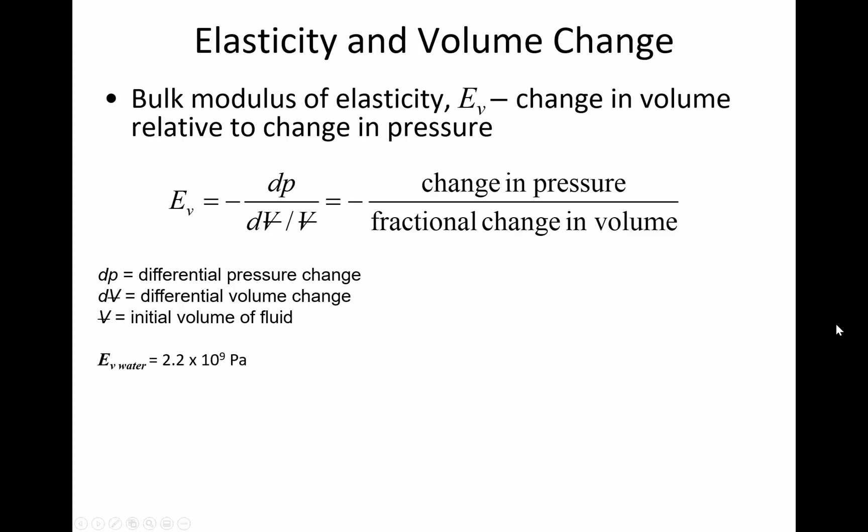So announcements. First, if you haven't already made arrangements to get a copy of the textbook, please do that as soon as possible. It's a valuable resource to get a second opinion on how to explain this material. I'm going to do my best to explain it clearly, but sometimes you need to hear things from a different perspective. The homework assignments mostly are questions I myself have written, so you won't need the textbook for the homework problems, maybe with a few exceptions, but you will need it to learn and understand.

So that's the first bullet point. The other is, of course, I am accepting calls on Microsoft Teams, just so that both of us can get a feel for how to do this.

You need to call me for these 10 bonus points before Tuesday, September 1st, at 5 p.m. You're welcome to try calling me outside of my office hours. It's just that I may be in another meeting or away from my desk, so it's during office hours that you have a much better chance to get a hold of me. And I'll pick up unless I'm already in another chat with a different student.

Homework 1 is going to be due on Thursday, the 3rd of September, before 11 a.m. Our class meeting is at 11 a.m., and you have to submit the homework assignment before class that day.

Let me show you where you can go to get homework number 1. If you go to our class page in Blackboard and click on the homework tab, you can see homework 1 is there. If you click on the PDF file, it'll bring up the homework problems. There are 9 of them for this assignment.

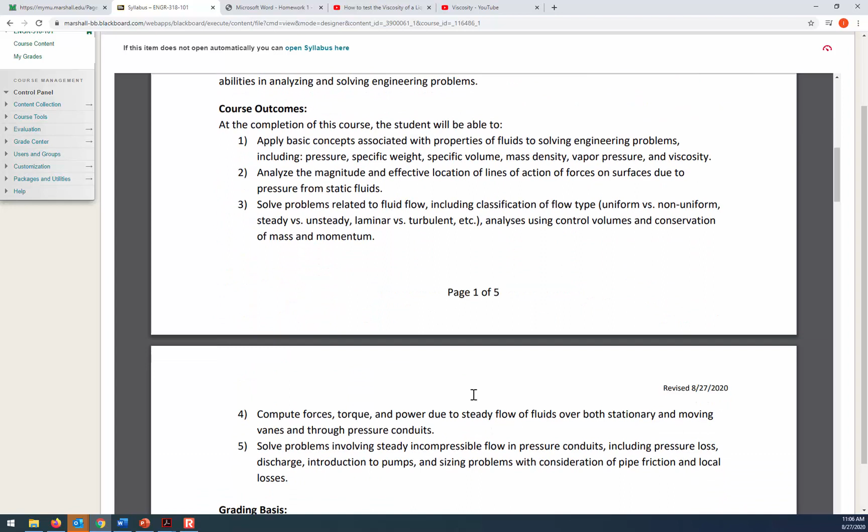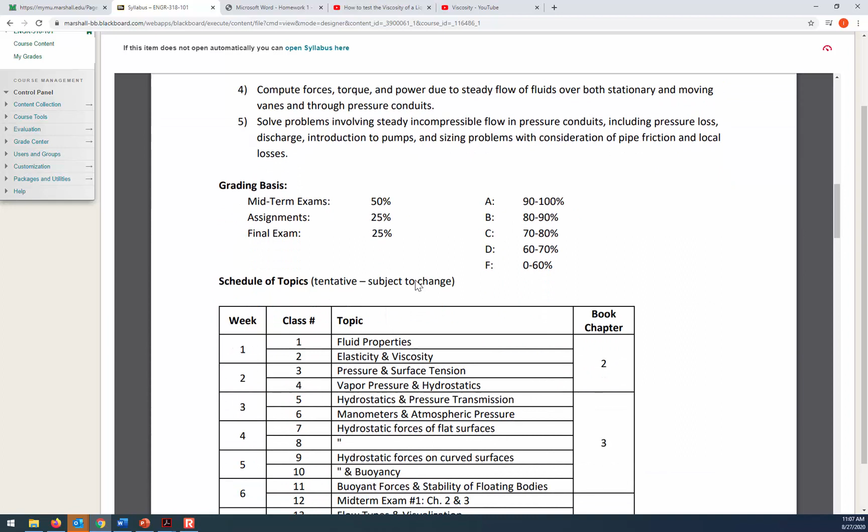Here's the ISBN for our textbook, if that helps you track it down. Then there's a list of objectives and outcomes, and I don't want to read those to you. I know you can read, so I'll leave you to go through them. We'll be covering each one in great detail during the classes themselves, but I do want to briefly go over the details related to the grading basis.

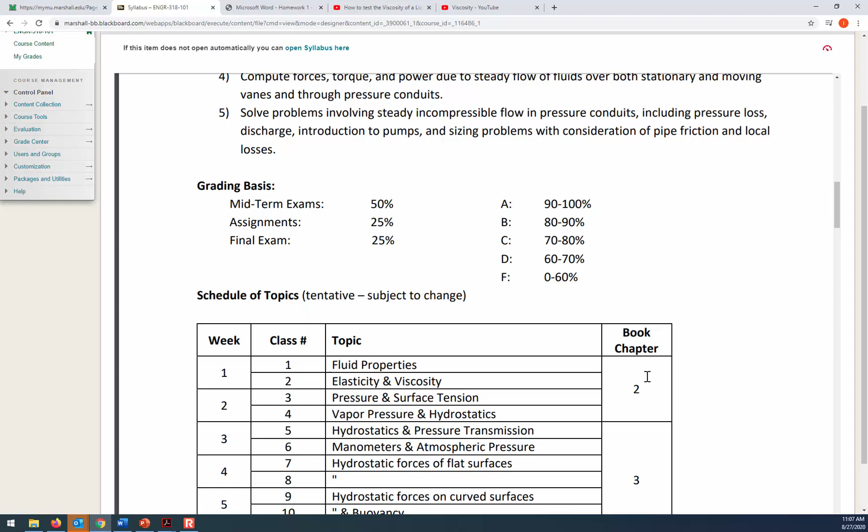We're going to have 2 midterm exams and a final exam, so 3 exams total, and each one is worth 25% of your course grade, with the other 25% coming from homework assignments. In an ordinary semester where we were face-to-face, I'd also give you a couple of quizzes worth 5 or 6% of the homework grade, but it's not feasible to do those quizzes this semester—it would take away too much instructional time. So I've put those points back into the homework assignments, increasing their value.

The schedule of topics mirrors what you've already seen if you looked over the schedule I posted and reviewed in Tuesday's class, so this won't be any different from the course schedule document we previously reviewed. But I do want to spend a little time talking about my expectations having to do with academic integrity.

I covered this during the lab, but not all of you were taking the lab. So I want to emphasize that when you turn in your homework assignment, it needs to be your work exclusively. It shouldn't be something your friend helped you solve, a solution from another student in a previous semester, or a solution you found online. It needs to be your work.

When I identify cases of academic dishonesty, those are going to be punished pretty dramatically.

On the subject of homework assignments, I drop the 2 lowest homework scores from your calculation of the overall course average. So if you accidentally forget to submit an assignment before the due date, you can use one of your 2 dropped scores on that. Or if you do all the assignments, I'll just drop the lowest of your homework scores.

Because dropping the 2 lowest homework scores is pretty generous, I don't accept any late work. It's not practical for students to turn in homework late when we've got as big a class as we do, and when the homework grader is going through your assignments as soon as you submit them. We want to provide timely feedback, so we can't leave it open-ended for when homework gets turned in. There's a due date and no exceptions unless it's an official university excused absence.

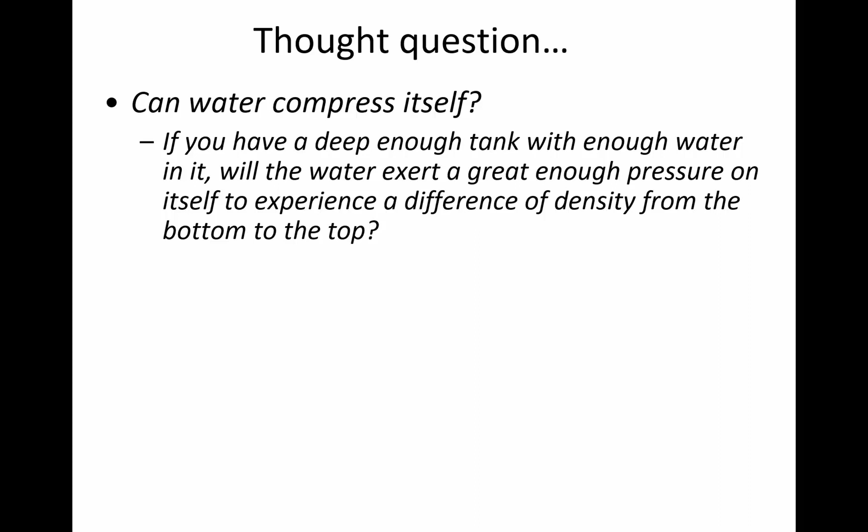First, I wanted to point out that next semester I'm going to be throwing this slide into my presentation. You may remember we had a discussion about whether at the bottom of the ocean water compresses itself because of the weight of the water above. I thought that was a really interesting thought question, and I learn from your great questions sometimes - what's interesting to students and how I can be more thought-provoking. So I'm going to throw this slide in next semester, and I just wanted to illustrate that even though we're talking remotely right now, it's still possible for us to have a good interactive experience. I appreciate the questions when you've got them - it makes it easier from my perspective to teach.

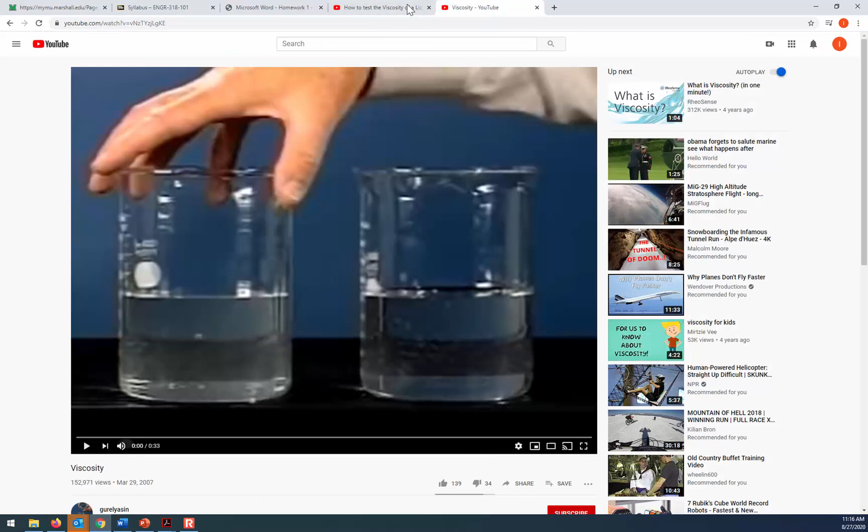Let's watch a video clip that also addresses this same issue. All right, so I have - here we go. Bring it into full screen mode here. I'm going to mute it, and - all right, so fluid on the left, fluid on the right. Something's different.

The person is shaking two different fluids. They're both clear, there's the same amount, and they're in the same kind of container. But when you shake the one on the left, it sloshes around easily. The one on the right doesn't slosh around.

When you're shaking the container, you're applying a force to the fluid. The fluid on the left responds to that force and deforms relatively easily. But the fluid on the right isn't deforming as much. You're applying a force, but it's not sloshing around.

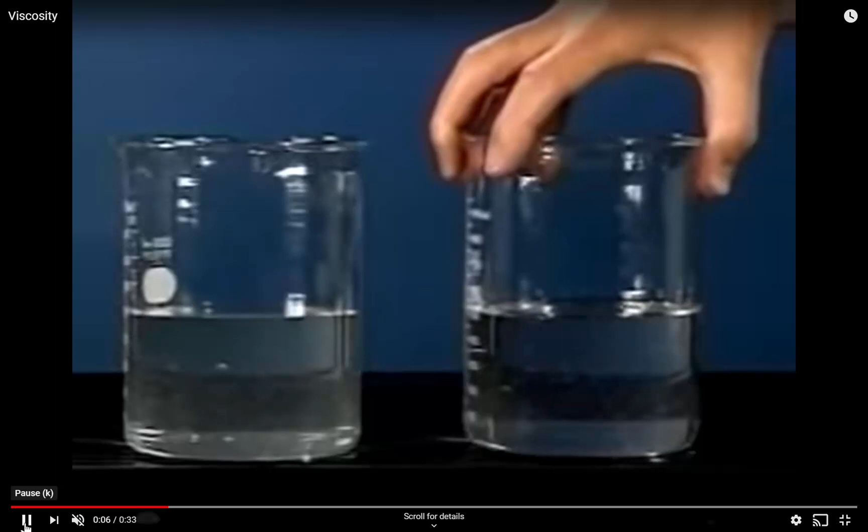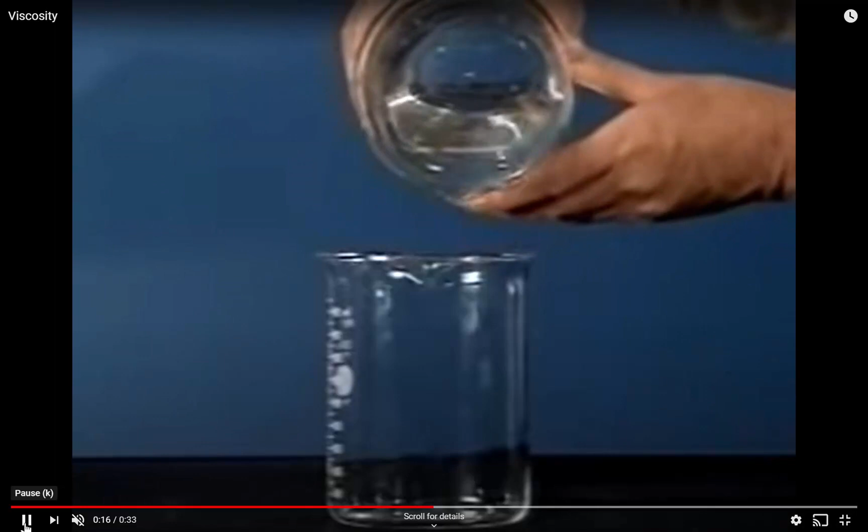Now let's see what happens if you pour it. The fluid on the left, which is water, pours easily. The fluid on the right, which is glycerin, pours really slowly. That's thicker than honey, thicker than syrup.

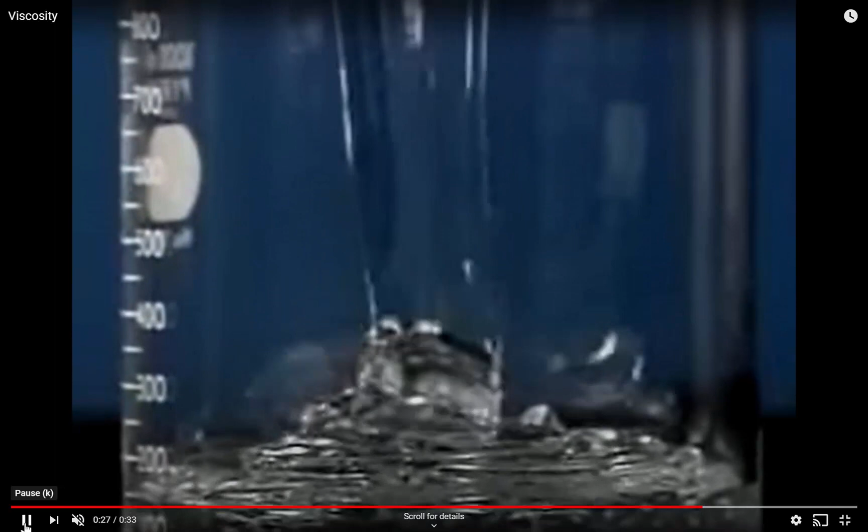It just looks so delicious, I want to put it on a stack of pancakes. Glycerin and pancakes, it's a winning combination.

So this illustrates the principle of viscosity. Let's talk about viscosity in detail. To understand viscosity, we have to define some terms here.

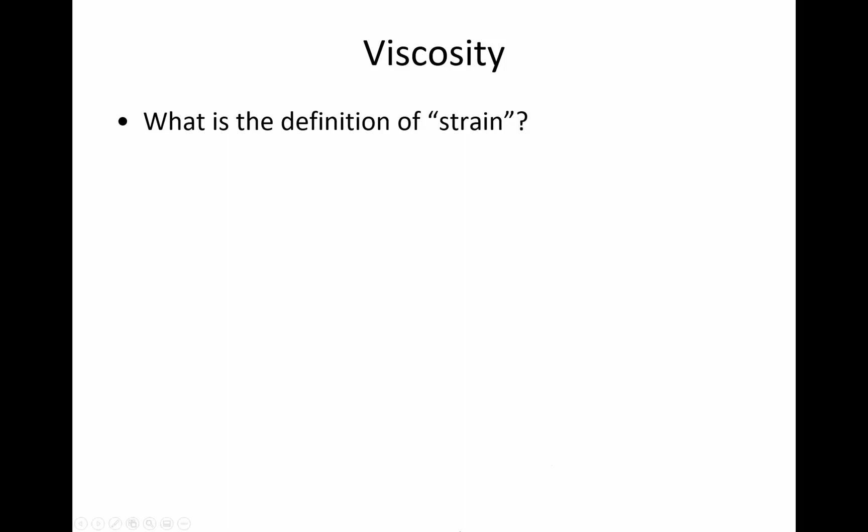You may remember from previous courses the word strain. Strain is the deformation of a physical body under the action of applied forces. We just saw in the picture forces being applied and the fluid deformed.

But solids also can deform when you apply a stress. I wonder if I have my ruler in here. I do, brilliant. So I've got this metal ruler. I don't know if you can see the picture of me, it's probably pretty small down there at the bottom of your screen, but I'm holding up a metal ruler.

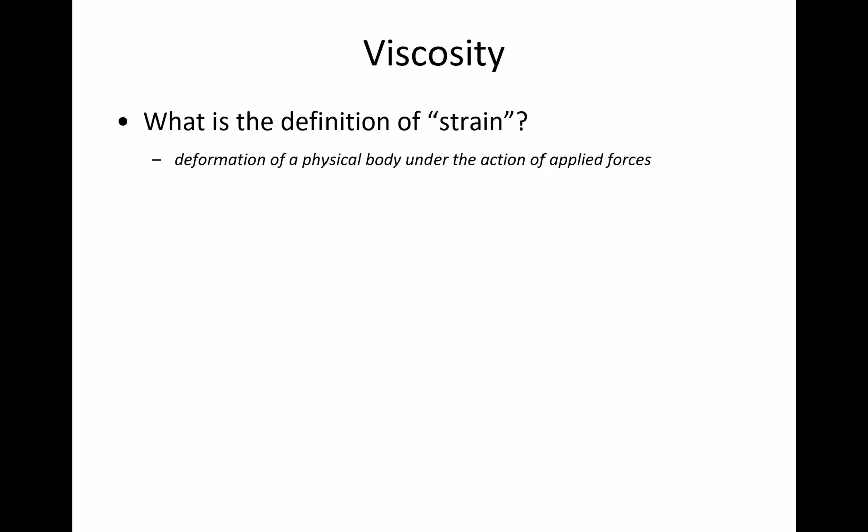If I press on that metal ruler, I'm applying a force right now, and it's deforming. Can everybody see it's formed into an arch? Now it's not moving anymore, it's stationary, but I am still applying a force. So right now, the physical body is deforming, and the strain is that deformation under the action of the applied force.

A solid has this proportionality factor between the shear stress applied and the shear strain. So the stress is the force, the strain is the deformation, and the relationship between the two is defined by the shear modulus.

So this is steel. How do you think it would be different if this was titanium? Maybe we don't know a lot about titanium, but maybe you do. What do you know about titanium compared to steel? It's more brittle, it would probably break.

It's more brittle, it would resist the deformation. If I applied this much of a force, if it deformed this much, it probably would break. But just think about my weak little fingers, my weak engineer fingers, I couldn't break titanium with these little weak fingers. But what would happen is it just wouldn't deform as much if this was titanium. So steel deforms a lot, titanium deforms a little bit.

So there's this material property, the relationship between the stress that's applied and the strain that is experienced by that solid. The proportionality factor is the shear modulus.

Well, there's a similar thing in fluids. In a liquid, that proportionality factor is called viscosity. And one of the many differences between a liquid and a solid is that in the case of a liquid, it continues to deform as long as the shear stress is applied.

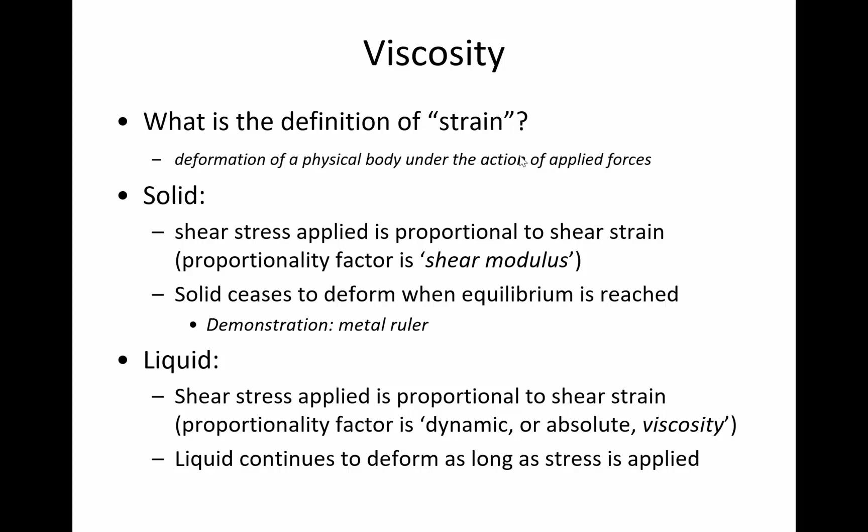All right, so one of the principles that's an application of viscosity is the fact that a river has a different velocity at the top as it does at the bottom.

So we have a river here in Huntington, the Ohio River, and you maybe have noticed that when you look at the top of the water, it looks like it's moving pretty quickly. But if we went down to the bottom where the water is in contact with the soil, the velocity would actually be 0.

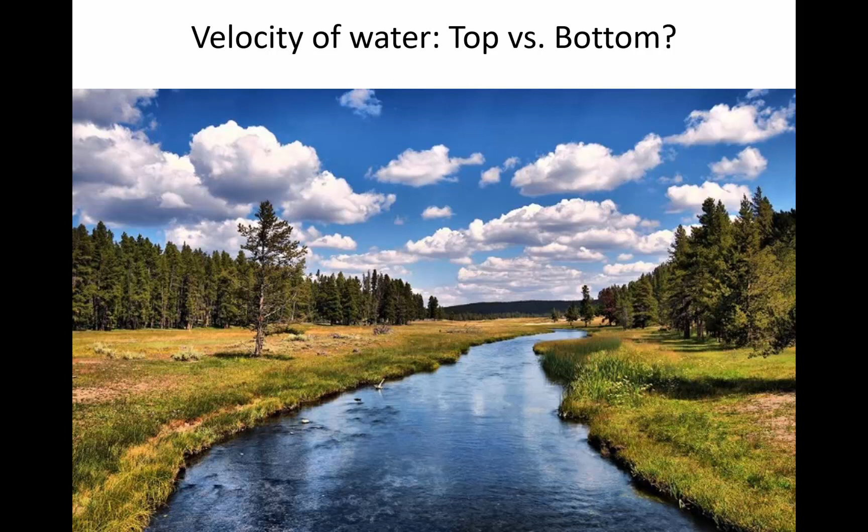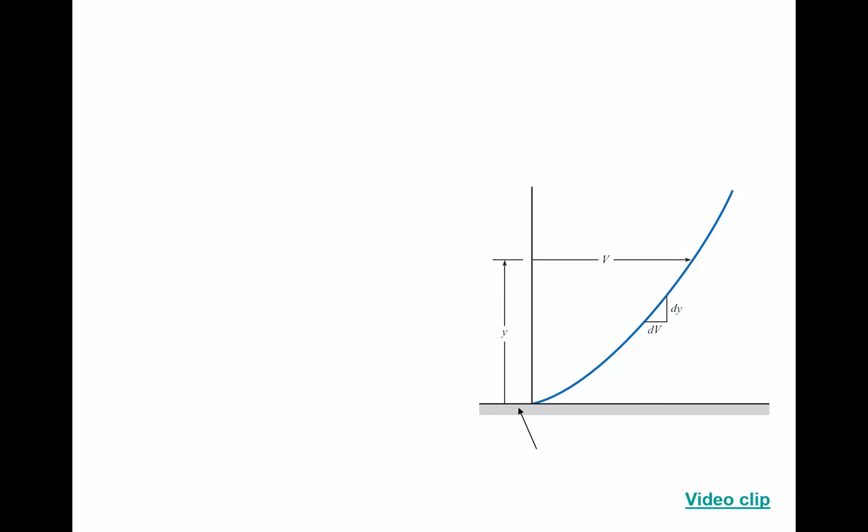So let's watch a video clip that introduces this idea that at the bottom of flow, where the water is in contact with a stationary solid, the liquid velocity is 0. Let me bring up another video here. Oh actually, I think this video isn't on YouTube, I think it's one that's on my hard drive, so I'll just bring it up that way.

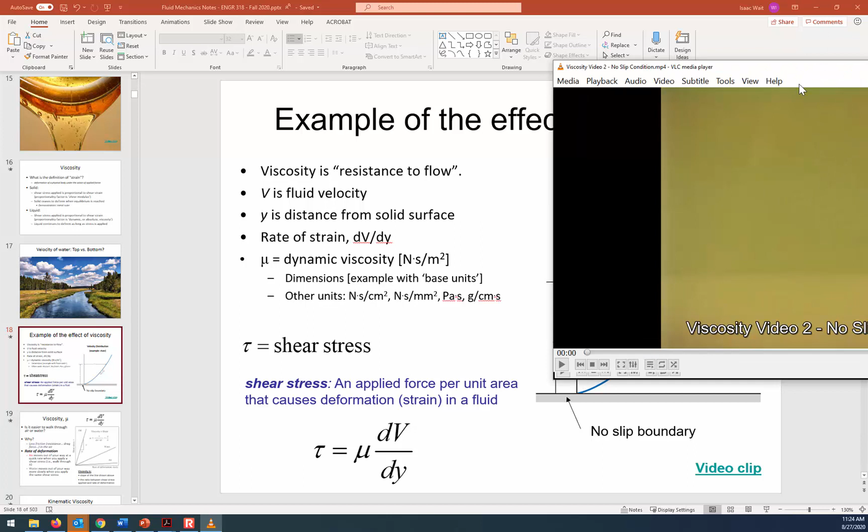This is a straw going down into a flume. Most of you went into the fluid mechanics lab this week, and in the back of the room there was that big long channel. You can think of it like a big plastic simulation of a river. There's clear acrylic on either side, and the bottom of it is plastic. So you're putting water down this channel, similar to a rain gutter on your house, just a long rectangular channel that carries water.

So in this case, water is flowing from the right to the left - no, I don't remember what direction the water is actually flowing, we'll see. This is a straw, and it's going to be injecting a dye, and we're going to see what happens to the dye that's being injected. They're going to put the straw down at the bottom, and right now that straw is touching the bottom of the channel, think of it as a simulated river, and this straw full of dye injects a little bit of the dye.

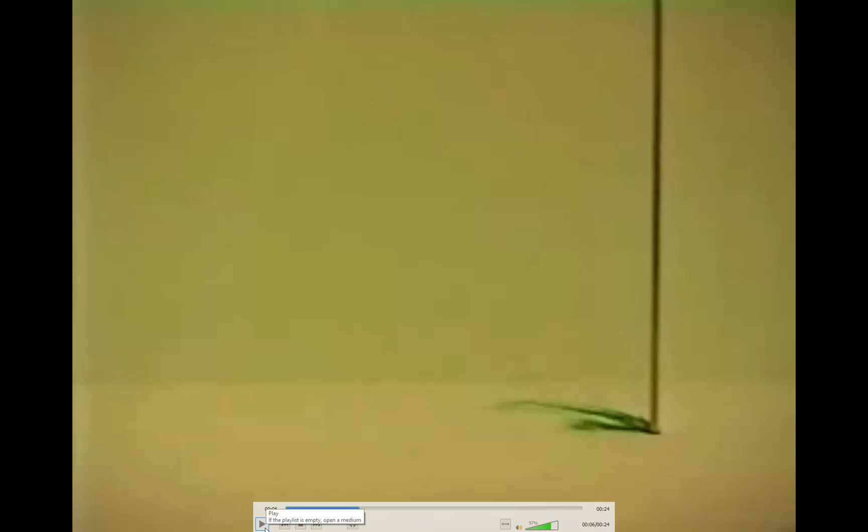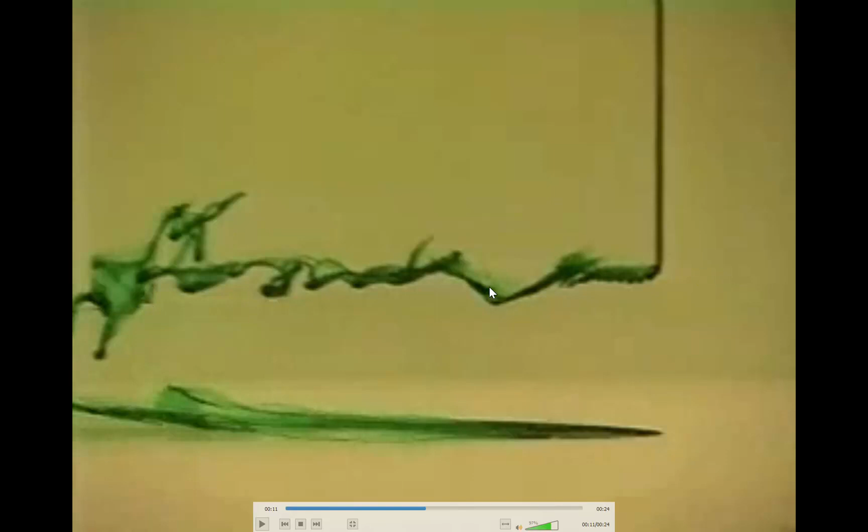Can you see the green tracer? They're injecting some of that green tracer, so it's like a big blob of dye, and it's not sticky, it's a water-soluble dye, not like glue or anything like that. But it will stay at the bottom because the velocity down there is essentially 0. Now when you take the straw back up into the rest of the stream, you can see these ripples and turbulence indicating that the water is flowing from the right to the left. So the dye is acting as a tracer, but there's still this big clump of dye down at the bottom because the velocity of the liquid is 0.

But when they put a spoon down in there and stir it around, the dye goes away because you finally put enough velocity to make it go downstream. So that's just an illustration of the no-slip condition.

So the question is, can it be assumed that the farther away the liquid particle is from the stationary surface, the faster it goes? Yes, that's a great question, and that's the correct observation. This velocity distribution is kind of an illustration of that effect.

The farther away you get from the bottom, where you have the no-slip condition, no-slip boundary - that just means that the bottom of the river isn't moving, the bottom of the river is stationary - the farther away you get from the bottom, the faster the liquid is, because that solid surface down there is applying a resistance to the movement of the fluid.

All right, so if we define some of the terms here - would this not be experienced on the sides as well? Yes, it would be experienced on the sides. That was clear plastic acrylic on either side, and you're right, it's not just the bottom, it's any place that the water is in contact with, it's going to have that no-slip boundary.

Okay, another question from Zach: Aren't the velocity and location of the fluid particles dependent on the location of the force applied to the fluid body?

Not sure if I understand that question. Yeah, I'm sorry Zach, I don't understand that question.

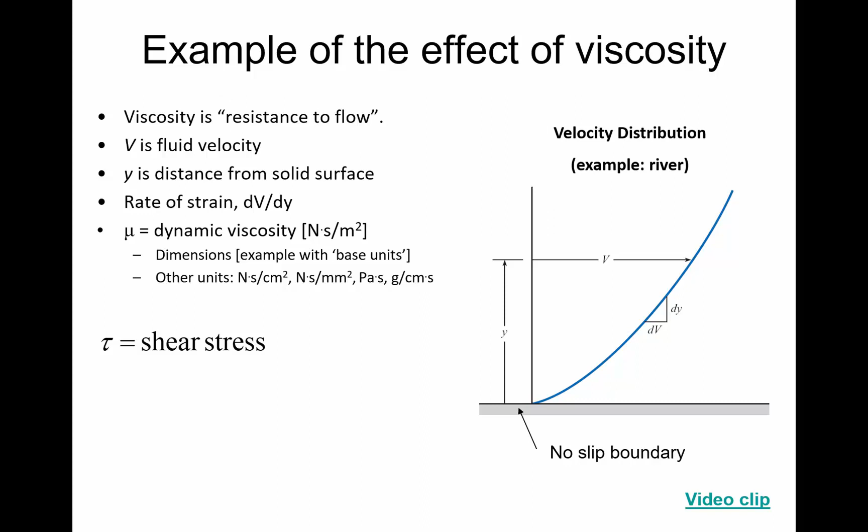The shear stress is the force that's applied per unit area. So if you think about the units of shear stress, it's force per area. The relationship between shear stress, deformation, and viscosity is shown in this equation. Viscosity is the proportionality factor between the shear stress that's applied and the response of the fluid. So shear stress is force per area, and dV/dy is the rate of strain - basically how quickly the velocity is increasing the further away you get from the boundary.

So think about this velocity distribution. Right now, let's say this figure is a river of water. What if it was a river of pancake syrup? Well, that would be delicious. But what we know about pancake syrup is that it has a higher viscosity than water does. So there wouldn't be as steep a curve if this was pancake syrup - you'd have to go further away and maybe the velocity would just be a little bit higher. So it wouldn't be deforming as readily if it had a high viscosity. You can think of it that way.

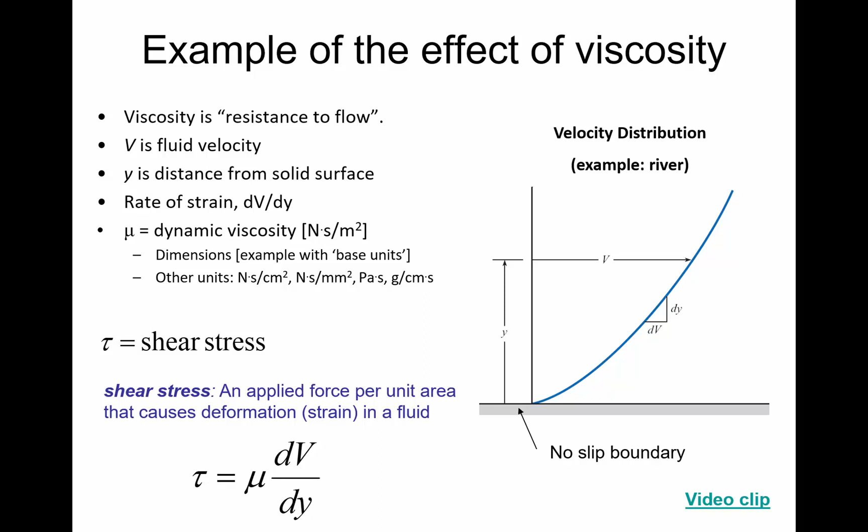So why is it easier to walk through air? Because it has a lower viscosity. There's less friction - you can think of it as resistance or drag force because of the viscosity of the fluid. Another way to think about it is that it's deforming at a higher rate than water can because the viscosity is lower. Back to this formula: if you have a low viscosity, you can have a large dV/dy for a certain amount of shear stress applied. So applying a shear force to a fluid, a low viscosity will give you a big dV/dy. If it's a big viscosity, so if mu is large because it's pancake syrup, then for the same force, the rate of strain has to be lower.

Air moves out of the way quickly when you apply a shear stress. Water and other liquids that have a greater viscosity will move out of the way more slowly. So here's that equation again: shear stress is viscosity multiplied by dV/dy, which is the rate of deformation or rate of strain.

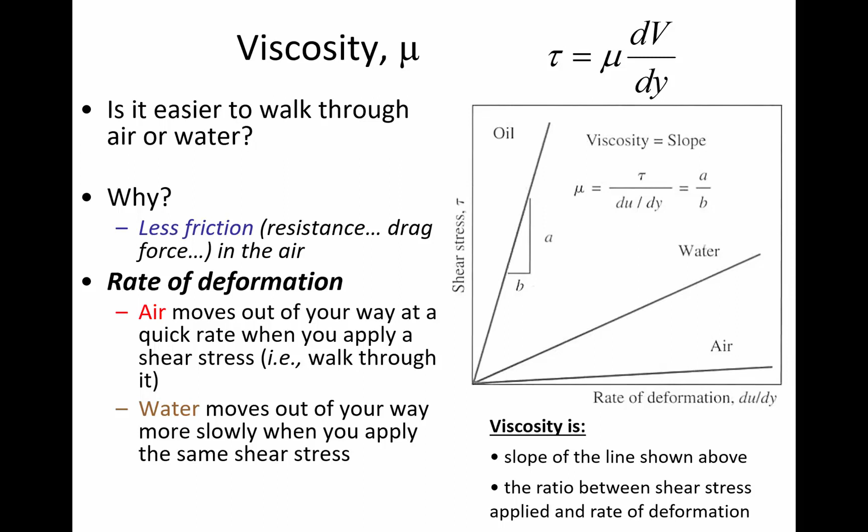Shear stress divided by the rate of deformation is how we define viscosity. So viscosity is the slope of the line if we were thinking about it in graphical terms, which means it's the ratio of shear stress to the rate of deformation. One way to think about viscosity is as its resistance to flow: something with a high viscosity will have a high resistance to flow, and a low viscosity will have a low resistance to flow.

Let's look at another video.

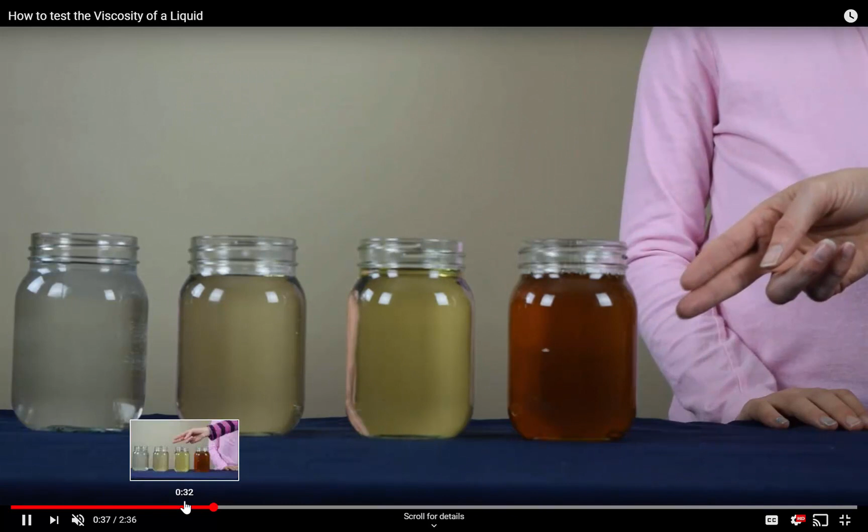This is an experiment where we have several different fluids here—I think it's water and maybe an oil, honey. To illustrate that there's differences in the viscosity, they're going to drop a ball into each one of them. How quickly the ball settles to the bottom of the liquid is a reflection of how easily the liquid is deforming out of the way.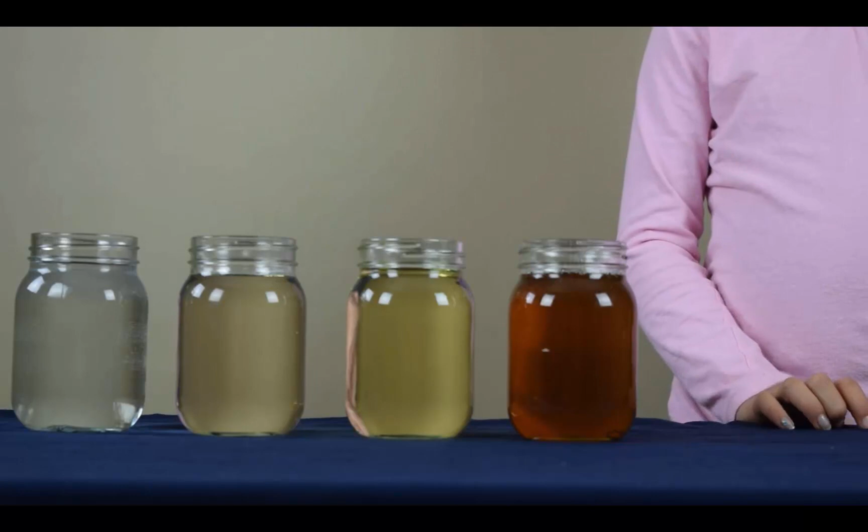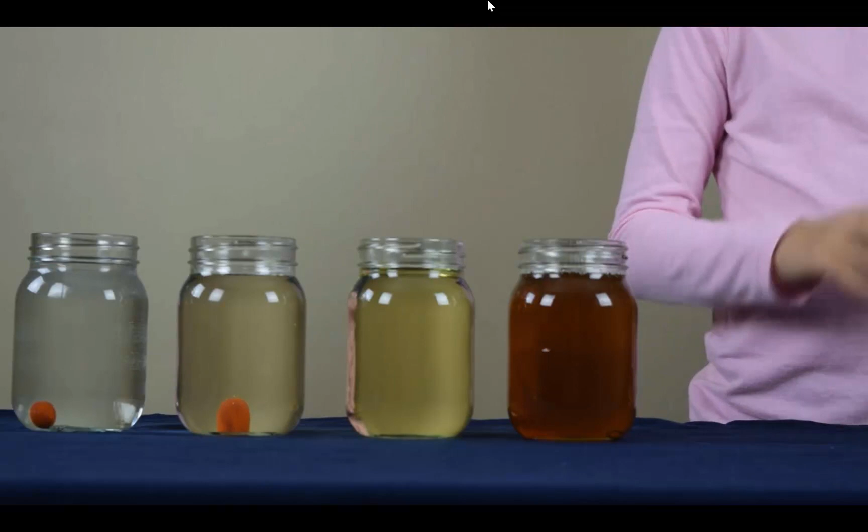And so, wait for it, it'll be worth it. Starting on the left, the water, dropping that marble—oh, I think that must have been water because it fell really quickly. So water is a liquid, a fluid, right? Okay, this looks like an oil, and we could, with a stopwatch, time how long it takes for that ball to settle down to the bottom of the fluid.

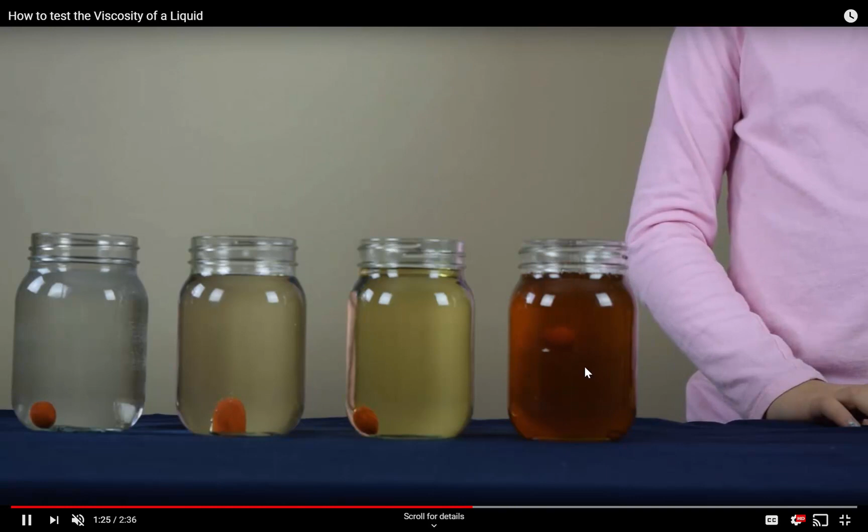There's different viscosities and different speeds that it settles. This one must be really thick because it is deforming out of the way so slowly. So these are just another illustration of viscosity, and you could characterize viscosity by how quickly the fluid deforms out of the way.

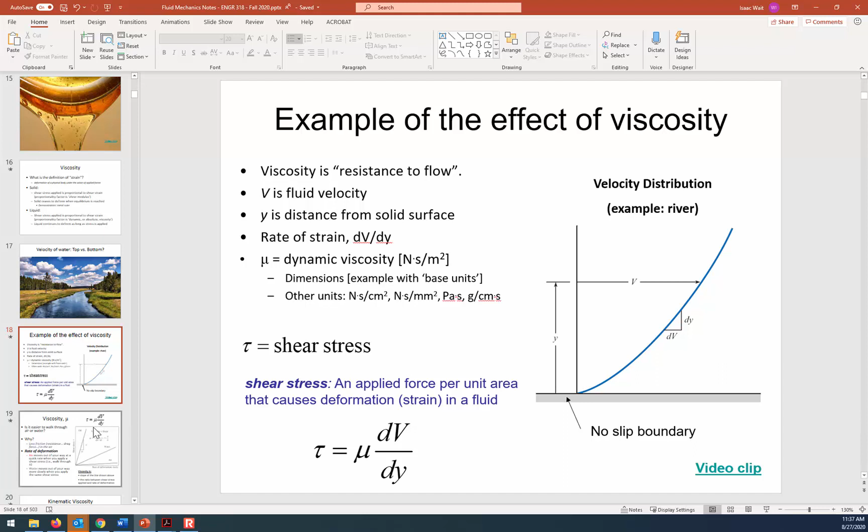Remember, terminology-wise, what we've been talking about so far is absolute viscosity, which is the same thing as dynamic viscosity, and sometimes we just call that viscosity. I'm going to introduce another term now, and that is kinematic viscosity. Kinematic viscosity corrects for the fact that some fluids are more viscous when they have a greater density—there's a co-varying relationship between density and viscosity. A lot of equations in fluid mechanics have both the viscosity term and a density term, so to express viscosity independent of a fluid's density, we sometimes use kinematic viscosity as a variable. It's the ratio of viscosity to fluid density.

Here's the formula: we take mu and divide it by rho. Remember, viscosity has units of Newton seconds per meter squared, and density has units of kilograms per cubic meter. If we cancel those terms out—remember a kilogram is a base unit, but a Newton is a kilogram meter per second squared—if we expand the units of the Newton to its full base units and simplify, what we get is that kinematic viscosity has a unit of meter squared per second. So it's length squared per time, just another way of expressing a similar thing.

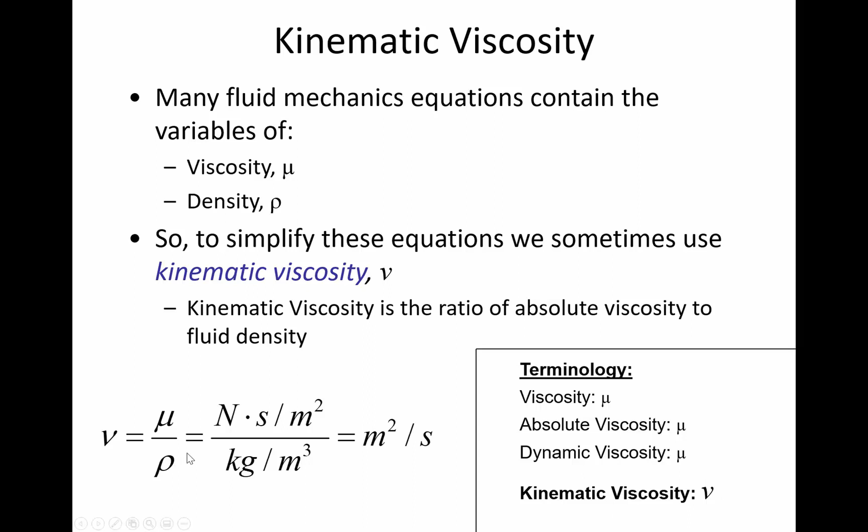Shear force is when you multiply shear stress over the area it's being applied. If we want to calculate the shear force for a fluid with a certain viscosity experiencing a certain rate of strain, du dy means the same thing as dv dy. Sometimes we use u for velocity, sometimes v, but here we mean the rate of deformation, du dy. This equation gives force in units of newtons.

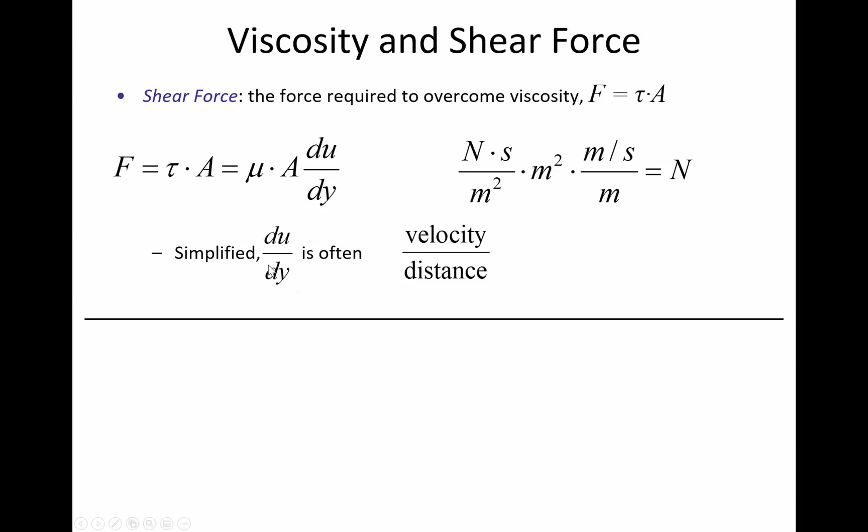The way we apply this formula is that sometimes there's a linear relationship between the change of velocity and the distance between two surfaces. So rather than assuming a curved velocity profile, we just use a linear distribution of velocity with distance to simplify and solve some problems.

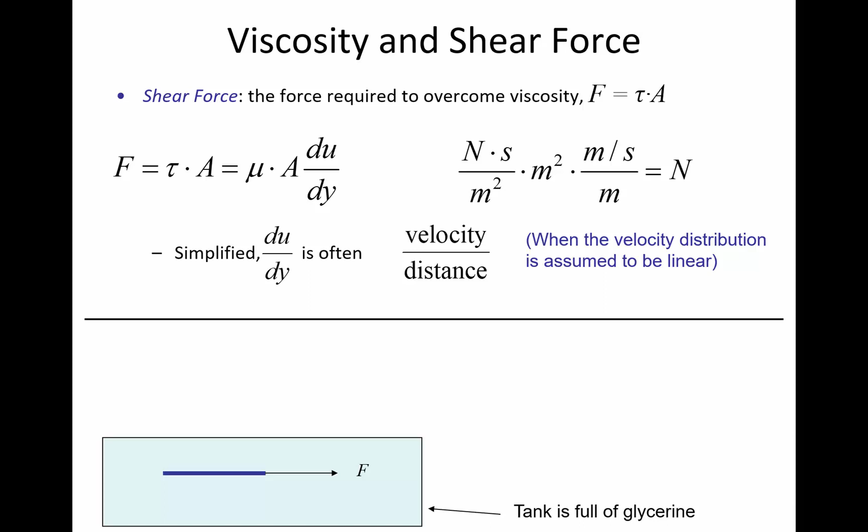Here's a physical instance where we can use viscosity to do some calculations. Let's say we have glycerin in a tank. Remember from an earlier video, glycerin poured out of the beaker really slowly. What we know about glycerin is it has a large viscosity — it resists deformation when a shear force is applied.

We have a metal plate that's 3 meters by 2 meters. That means it has a surface area on top of 6 square meters and a surface area on the bottom of 6 square meters, so in total a surface area of 12 square meters — 6 on top, 6 on the bottom.

If we tow it through the glycerin, we have to apply a certain shear force, a force to get it to move through the liquid. We want to achieve 0.58 meters per second — we want this metal plate to drag through the fluid at 0.58 meters per second.

We're given some technical data: the glycerin's viscosity is 0.15 newton seconds per meter squared. We also know the distance — it's closer to the top of the tank than to the bottom. It's 1.2 meters from the metal plate up to the top of the tank, and 2.4 meters down to the bottom.

What we want to know is solve for F — how big of a force is required to achieve this total velocity of 0.58 meters per second. Here's a hint: we're going to use the formula F equals viscosity times area times du dy, and we can just use velocity divided by distance as du dy.

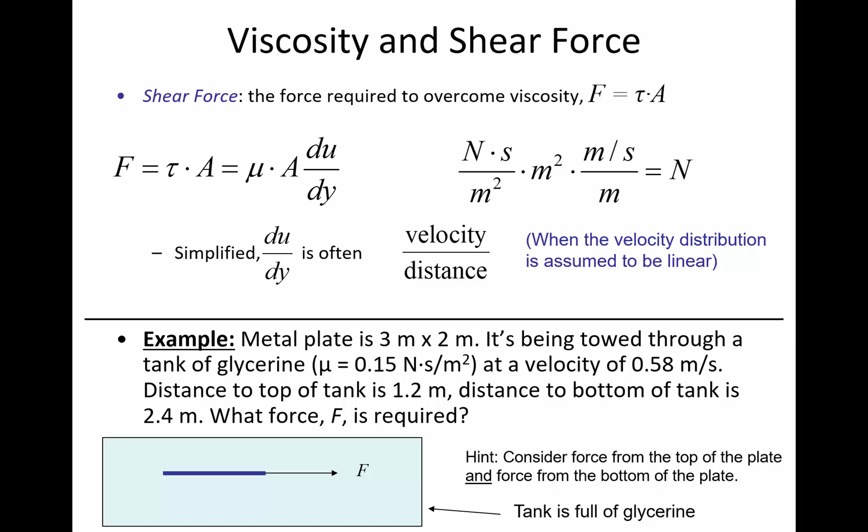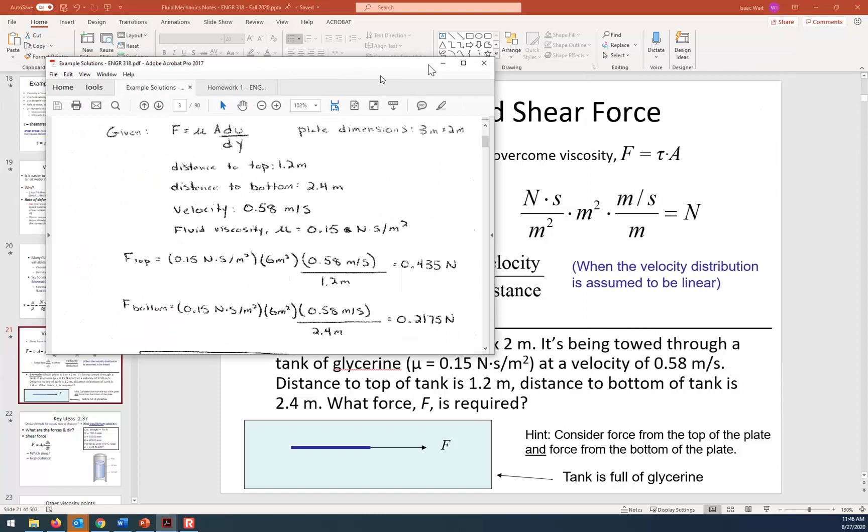We're trying to figure out the total force — let me drag this solution over to this screen. We have the equation that defines force applied: viscosity, area, and rate of strain. We know the distance to the top is 1.2, the distance to the bottom is 2.4, the velocity, and the viscosity — those are all of our knowns.

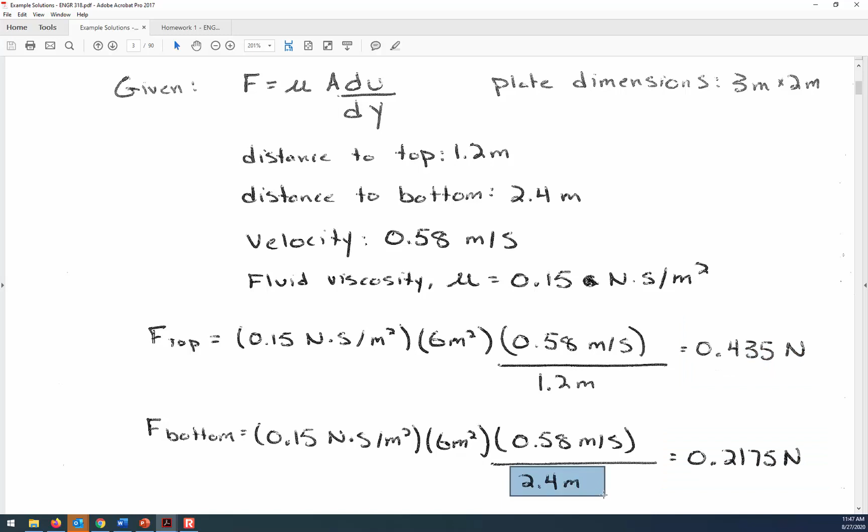To calculate the force on the top of the plate, since the top is closer to the location where the tank is stationary, there's a greater shear force there because the distance is less than at the bottom. Substituting in the numbers, the top force is 0.435 newtons, and the bottom force is 0.2175 since the distance is greater down to the bottom of the tank. The combined force when we add those two together is 0.6525.

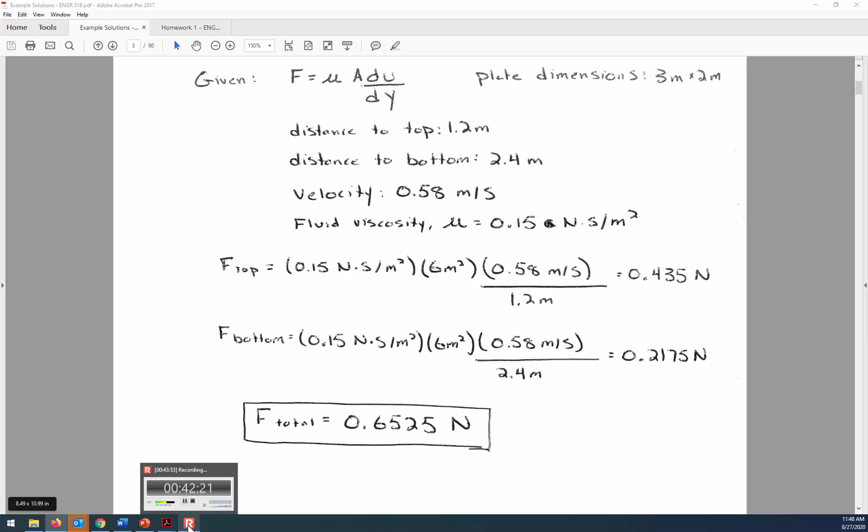Can you go over how we calculated the area needed for this? Because I know you said we need to do the top and the bottom, and we're doing 3 meters by 2 meters, so we have 6. But why are we not just doing the surface area of the face that's dragging through the water?

Good question, or glycerin for that matter. So this is the thin plate. The thickness of this plate is so small relative to its top and bottom area that there is going to be a drag force having to do with the front face of that plate, but it's going to be negligible compared to the drag force that arises due to the area on the top.

So let's say, for instance, if this plate is a centimeter thick, that's a pretty substantial metal plate, but still the area, if it's 1 centimeter by 2 meters deep, that's going to have a really small area in contact with the fluid compared to 6 meters of area on the top and another 6 meters on the bottom. So we neglect the thickness of the plate and the vertically oriented interface, because the dominant surface area is the top and the bottom.

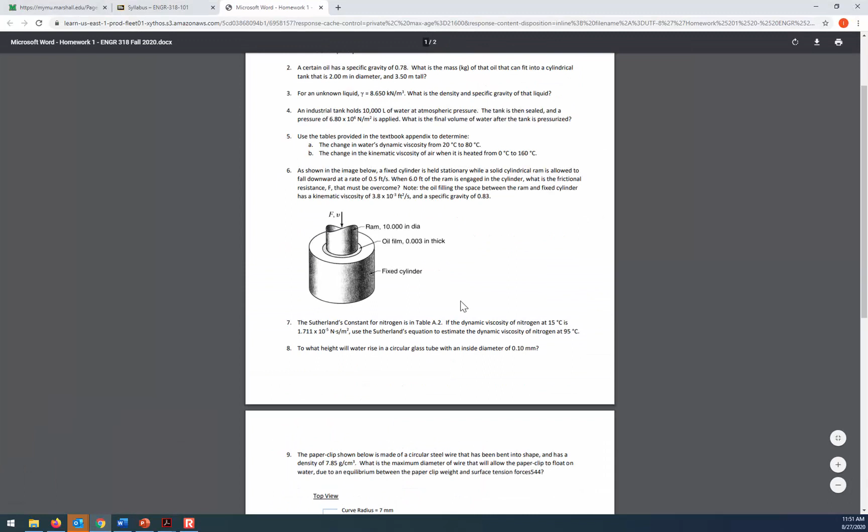I think you'll get a sense for how it applies as we look at a couple more examples. Let me bring up the homework assignment here. In problem 6, you have a cylinder that's falling down through a different cylinder that has a hole in the middle of it, and there's oil inside that boundary.

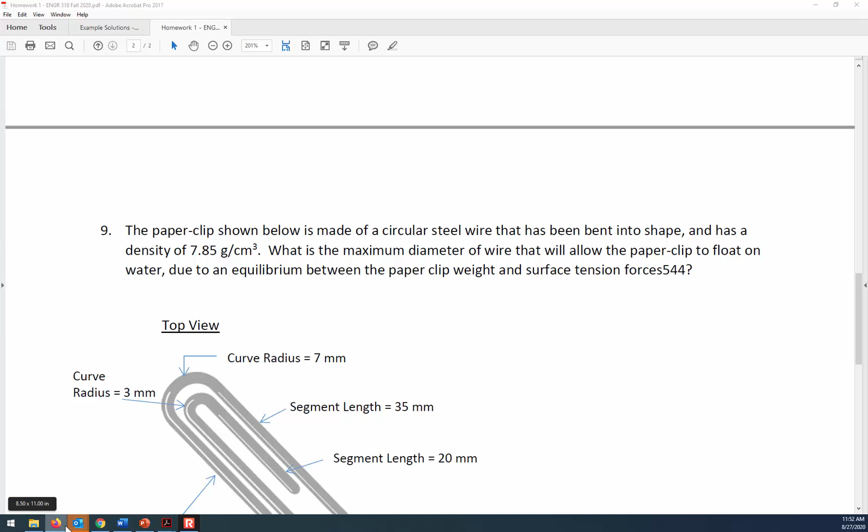That lubricating oil, if you think about the distance, is 0.003 inches thick. If this inner cylinder is falling downward, you're given the velocity, 0.5 feet per second. So thinking about this formula, that would be the du, the given velocity, and then the gap distance of 0.003 inches would be the dy. So here's the dv, here's the dy, and then the area.

So the question is about what area to use. It's going to be the area that is in contact with the fluid. If we think about a cylinder, like this water bottle, the applicable area isn't the bottom area of the cylinder, it's the side area. In this homework problem, it's the outside area of a cylinder, so you first find the circumference.

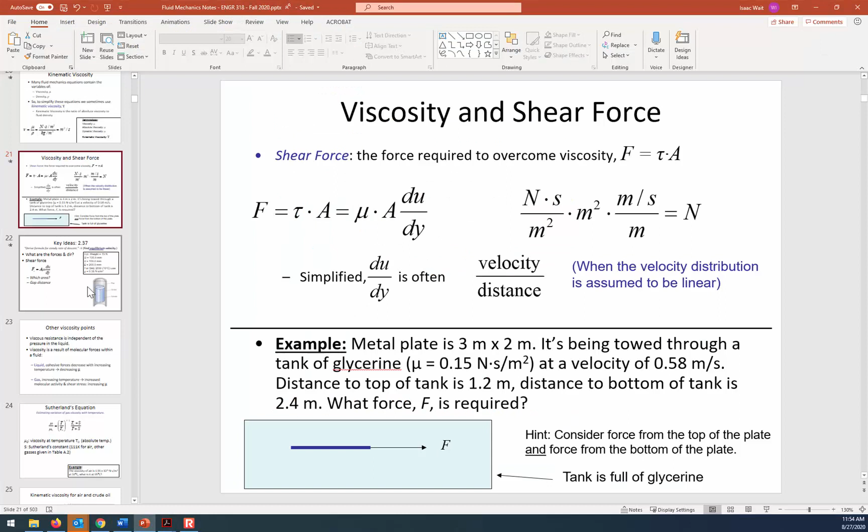So that's circumference pi d, and then the distance. Circumference times the distance would give you the outside area in contact with the fluid. That's the applicable surface in that homework problem. It's similar to a problem I used to give out of the textbook, where a cylinder was falling down through a pipe, with a similar gap distance.

The gap distance between the two is what defines the dy. The dv is how quickly it's falling. The area will be the area in contact with the fluid, but not the top or bottom area—it's the outside surface area. Where the gap is smallest is going to govern, because in the formula, the dy being small means you have a much greater force.

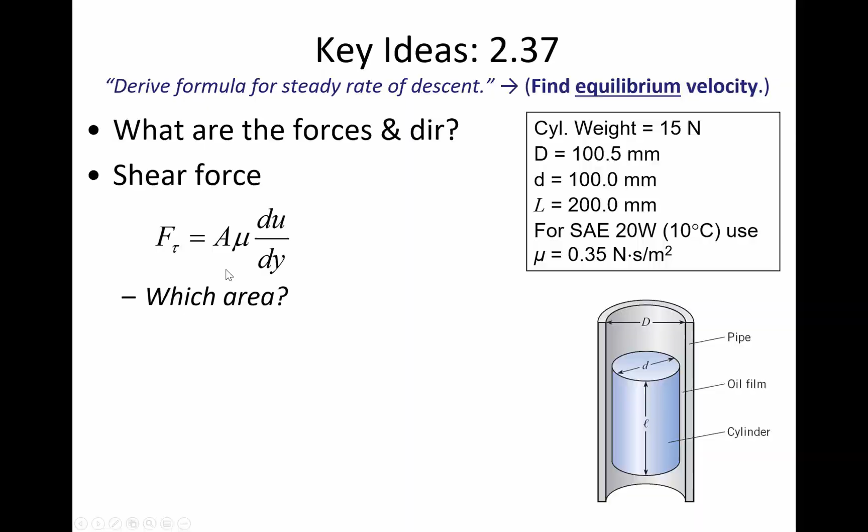Viscosity is independent of a fluid's pressure. So the viscosity of a fluid doesn't change if it is being compressed and pressurized.

Terry asks, by nature, will the cylinders always be concentric? I'm afraid I don't know what you mean by that, Terry. So here we have a cylinder. What is it you're asking? Do you have a microphone, Terry? So what I'm asking is, if you have that cylinder sliding down the pipe, by nature, would it be the path of least resistance for the cylinder to stay exactly in the middle of the pipe on its way down?

Gotcha, yeah, that's a great question. And I think you said it exactly right when you said the path of least resistance. That cylinder wants to travel at the highest velocity it can. Not that it has conscious preferences, but it wouldn't go up against the side wall, because then it would be falling more slowly. Just in the same way that water flows through the path of least resistance, the cylinder would fall through the path of least resistance, which is going to maximize the distance around the edge. So yes, it would fall down the center of it. It may bang back and forth, but in general, it's going to maximize its velocity.

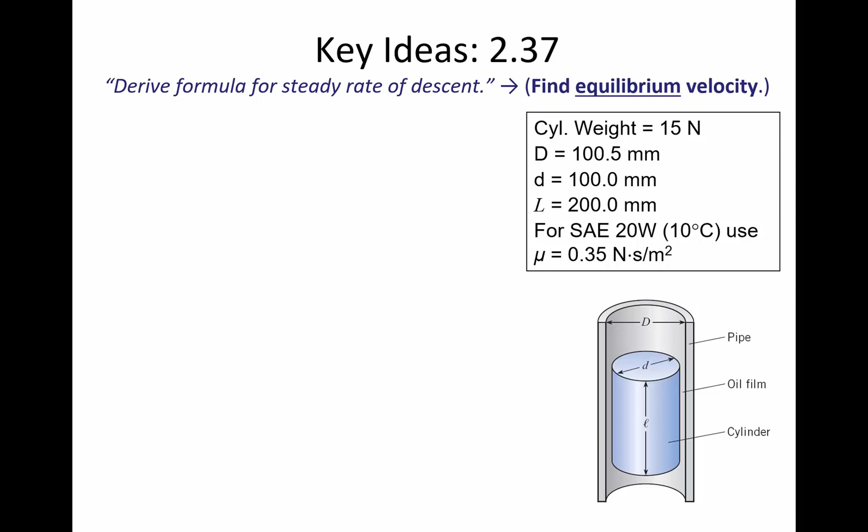Okay, so fluids don't change their viscosity based on the pressure that they're experiencing. This viscosity arises out of the molecular forces within a fluid. Fluids that have high cohesive bonds, molecular bonds inside of the fluid, are going to have those cohesive forces decrease as the temperature goes up. So viscosity does vary as a function of temperature.

You probably have seen that before when you change the oil on a car. If you've ever had the pleasure of sliding under a car and changing the oil, what you know is that if the oil is warm, it pours out really quickly. But on a cold winter day, if you don't let your engine warm up before you empty the oil, then it can drip out of there for hours. It just drips really slowly because it doesn't have the same viscosity.

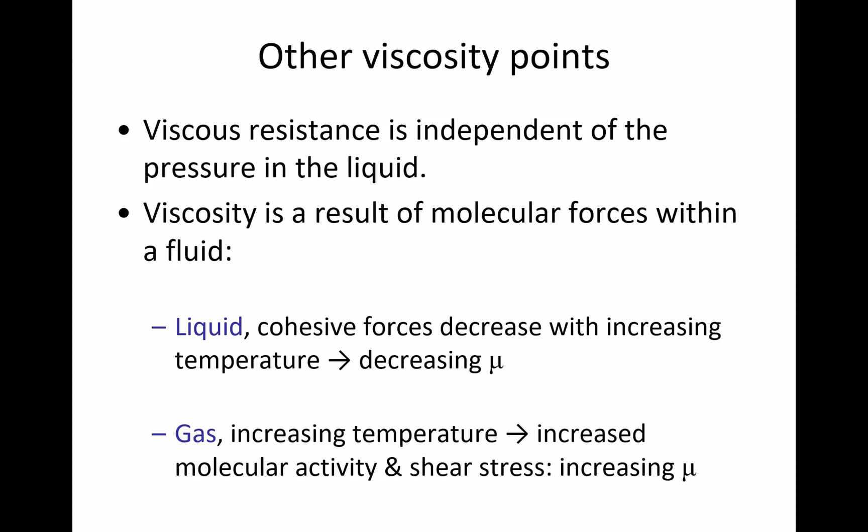So the temperature dependency of viscosity is that in a liquid, the viscosity decreases as the temperature goes up. But ironically, in gases, the opposite is true. When a gas temperature goes up, because the molecules are bouncing around more, since the molecules have more kinetic energy, that ends up having a slight effect that increases the viscosity of the fluid.

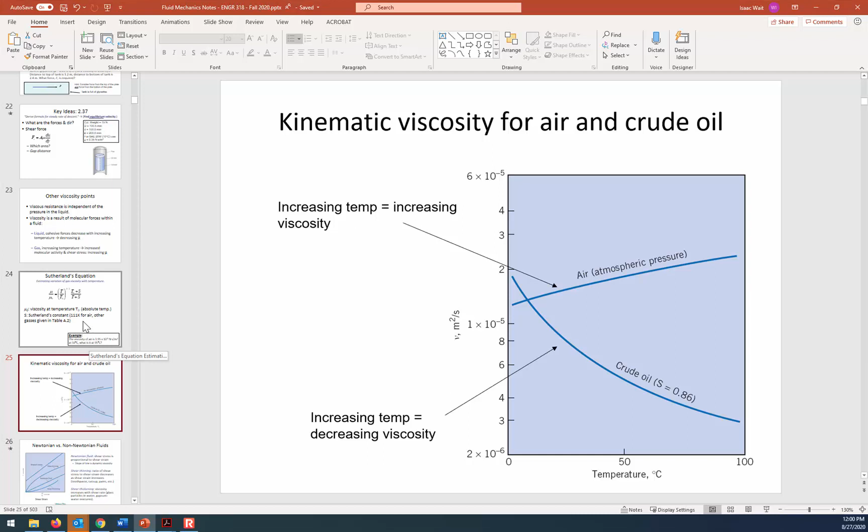So what Sutherland's equation does is allow you to estimate the effect of temperature changes on changes in viscosity. It's an empirical equation that lets you estimate the viscosity of a fluid at a certain temperature if you know it at another temperature.

So in this example, let's say we know the viscosity of air at 50 degrees Celsius is 1.95 times 10 to the minus fifth Newton seconds per meter squared. What if we wanted to find that same fluid's viscosity at 95 Celsius instead? We have to use units of Kelvin to solve this, so we'll convert both temperatures from Celsius to Kelvin and solve for mu, the viscosity at the new temperature, starting from the viscosity at the given temperature.

This is another one where I'd like to pause for a moment and give you a chance to try out Sutherland's equation, since there's a homework problem on this. Let's find the viscosity of air at 95 degrees Celsius - that's the unknown viscosity at T of 95, converted from Celsius to Kelvin. The original viscosity of 1.95 times 10 to the minus fifth was at a T naught of 50 degrees Celsius, also converted to Kelvin. I'll stop talking and give you a chance to exercise your calculators, and I'll be giving out gold stars in the chat box to people who get it right.

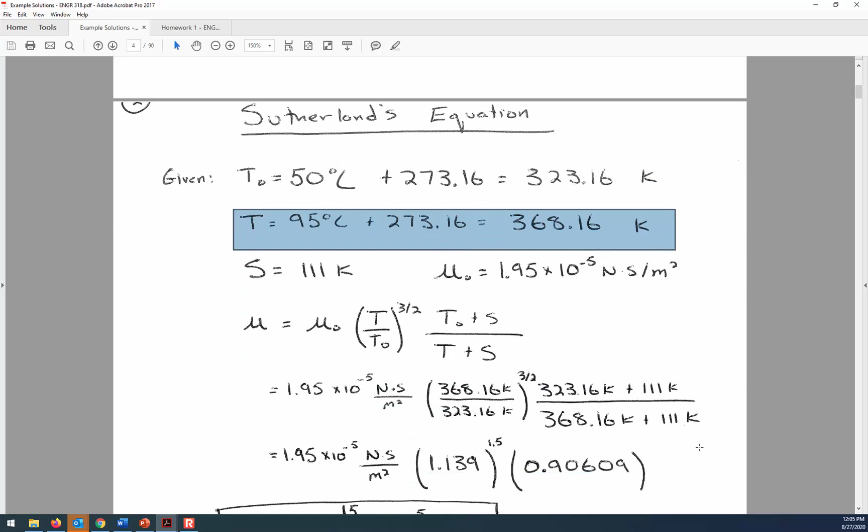The first thing we have to do in this problem is convert the given temperatures into Kelvin, which is par for the course when dealing with gas type problems. Our given initial temperature, for which we know the viscosity, is 323.16 Kelvin. The temperature where we want to know the viscosity is 368.16 Kelvin. We're also given the initial viscosity and Sutherland's constant.

You can see the substitutions I made there. Now, this is the first, but certainly not the last, time I'll point out a habit I think is really important for engineers: being really explicit when making substitutions. In this example, I wrote the equation first, then showed the direct substitution for every component of that equation, including the units. It's really worthwhile to write the units when substituting things in, because it helps you avoid mistakes like substituting the wrong variable in the wrong place.

For example, if you accidentally write the temperature in Celsius, say 50 Celsius, and Sutherland's constant is in Kelvin, you'd see these are different units and you can't add them together. But if you just wrote the numbers - 50 and 111 - you wouldn't have that same opportunity to recognize that the two shouldn't be combined. So include the units when you write down the numbers, and you'll make fewer mistakes. Also, it's just more professional and neater if you include the units.

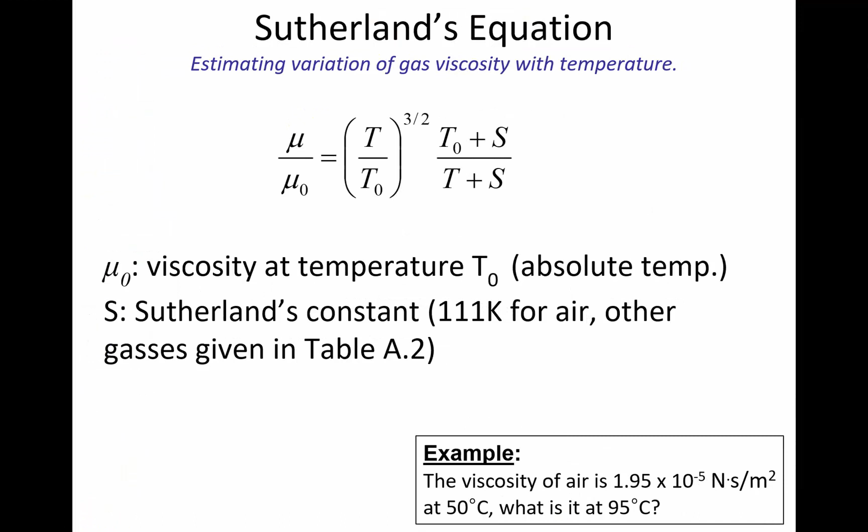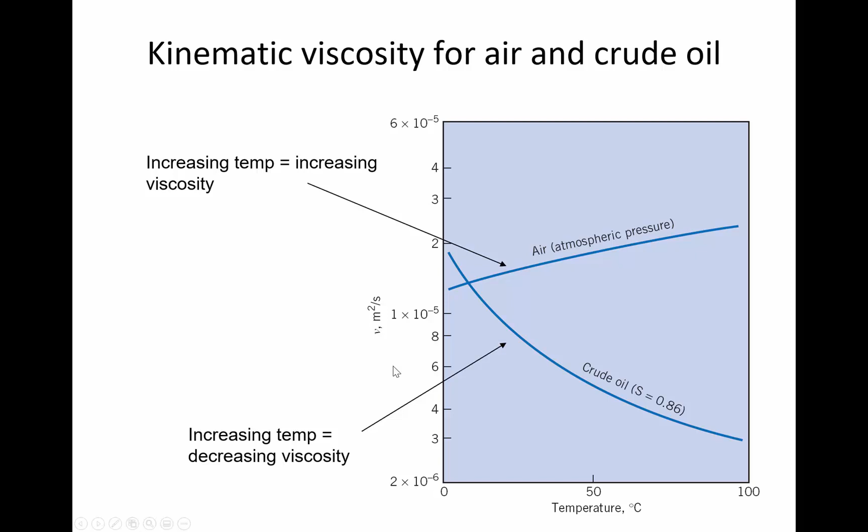All right, so we already looked over these figures for the viscosity of air and oil, and this is kinematic. Remember that the units for kinematic are length squared per time.

There are some other ways to classify fluids: a Newtonian fluid versus a non-Newtonian fluid. A Newtonian fluid is one where there's a linear relationship between shear stress and shear strain rate. Water is a Newtonian fluid, and the slope of the line is the dynamic viscosity.

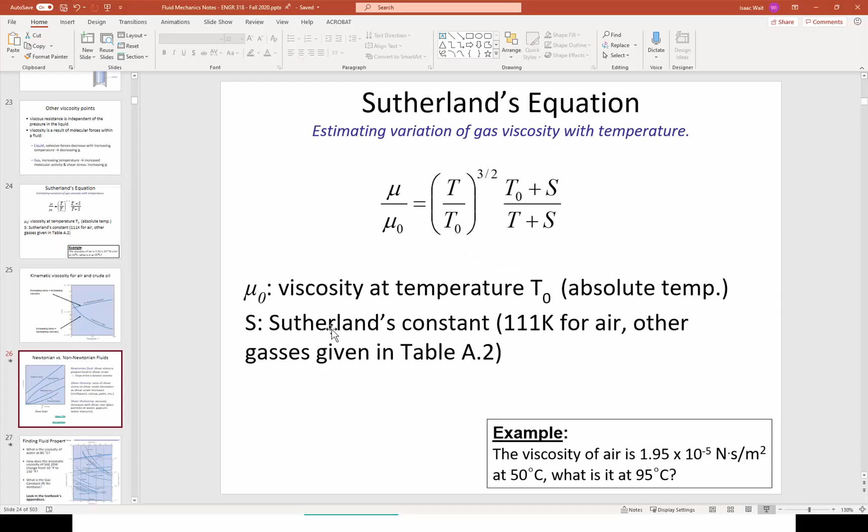But there are certain fluids that are a little bit funny. Let me show you a video clip before we go through the definitions in more detail. Let me see if I can copy that link and put it into my other browser.

Let's look at this other video as well before we talk about it a little bit more. Let me copy the link and paste it over here.

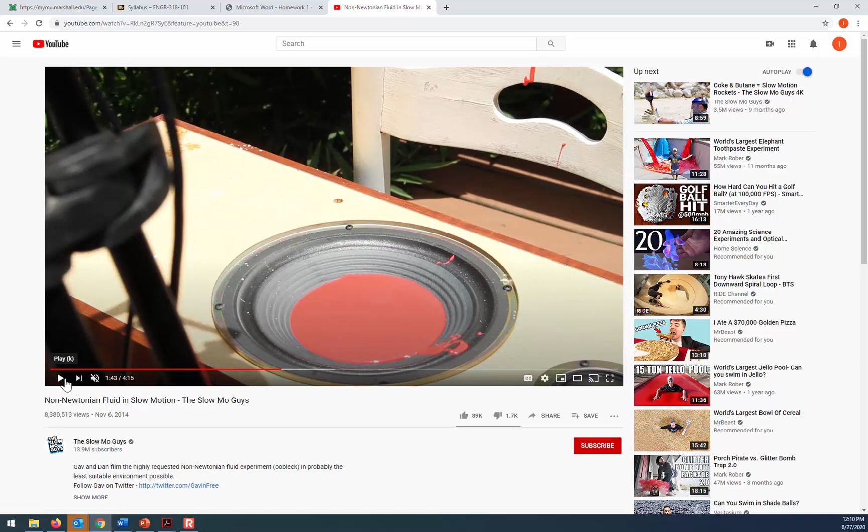All right, so this is a high-speed camera showing that same cornstarch and water mixture, with food coloring added to make it more visually appealing. When you apply a force to it, the viscosity of the fluid instantaneously changes. If you're not applying force, it has low viscosity, but as soon as you start applying force, the viscosity becomes higher, giving it greater resistance. Look at the interesting patterns that arise because of the movement of that subwoofer, and then they get it going with the high-speed camera.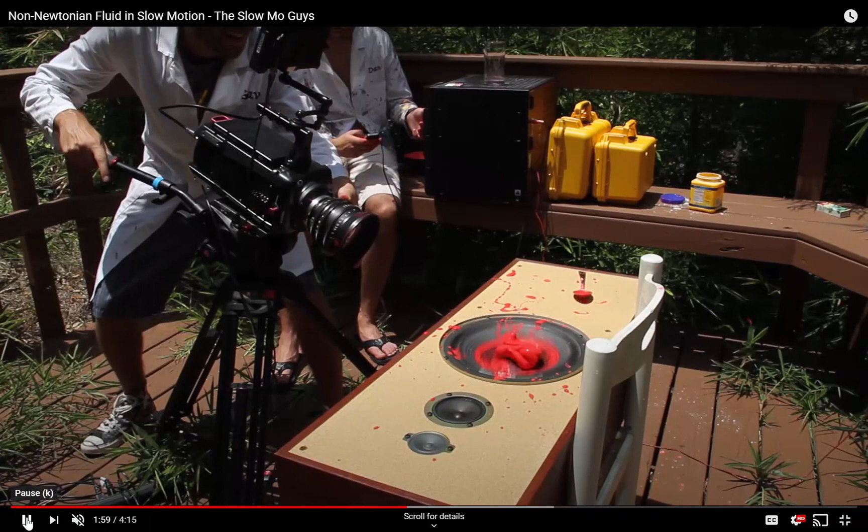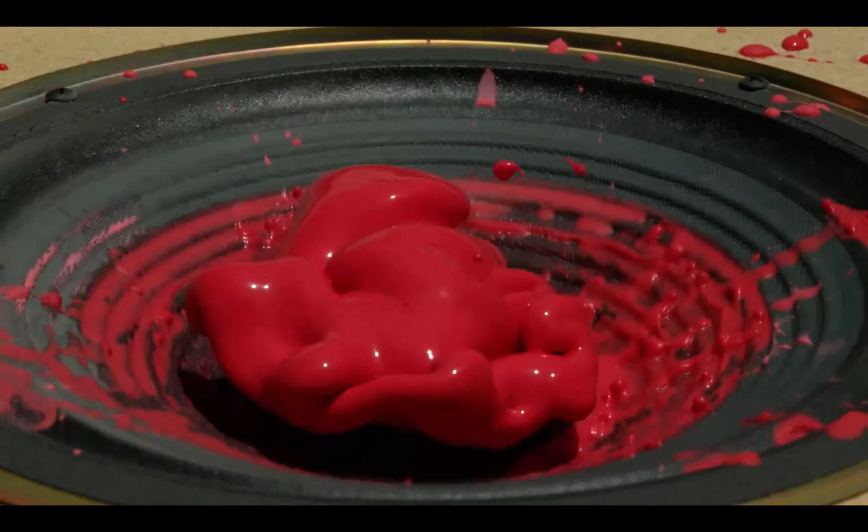Kind of interesting shapes. Hopefully they'll show us the high-speed footage here in a second. All right, here we go. It almost looks like an animation, right? But it's not, this is the actual footage. It looks fake, but what's happening is that as the subwoofer is moving, it's applying a shear stress to that liquid, and so the liquid's viscosity is changing as the force is applied.

In the lab next week, we're going to deal with this cornstarch water mixture so that you can get a tactile experience of what it means when a fluid is non-Newtonian. So those are a couple of video clips.

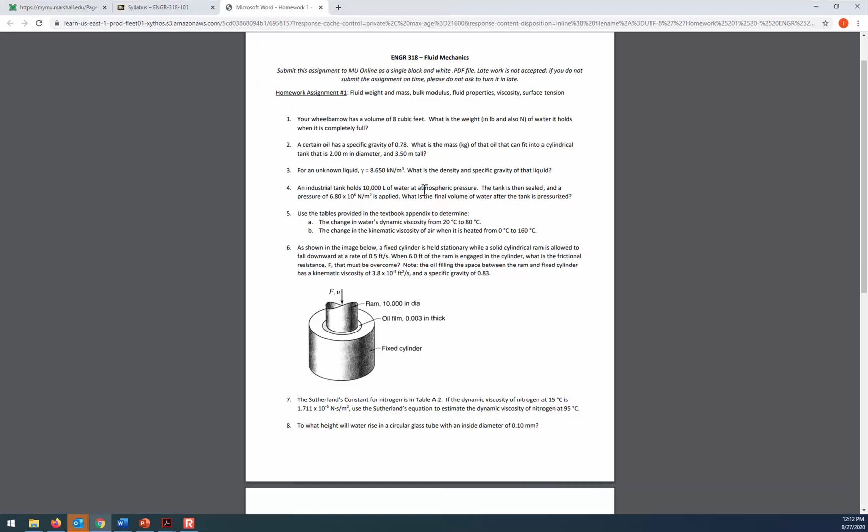Now let's go back to these definitions. A non-Newtonian fluid could be a shear thinning fluid, where when you apply a shear stress, the viscosity decreases. Ketchup is an example of that. If you've ever pounded the back of a glass ketchup bottle, you're applying a shear force to the liquid, and temporarily the fluid becomes less viscous because of the force applied. That's a shear thinning fluid.

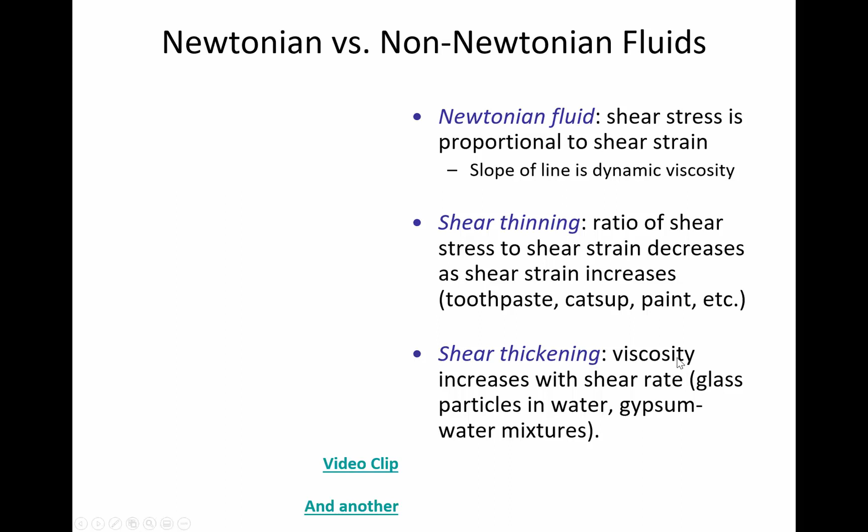A shear thickening fluid, which is what we just looked at in those previous two YouTube videos, is where the fluid becomes more viscous as a shear force is applied. So this graphical illustration shows that a Newtonian fluid is not affected, its viscosity doesn't change depending on what force is applied. But a shear thinning fluid becomes less viscous as force is applied, whereas a shear thickening fluid becomes more viscous.

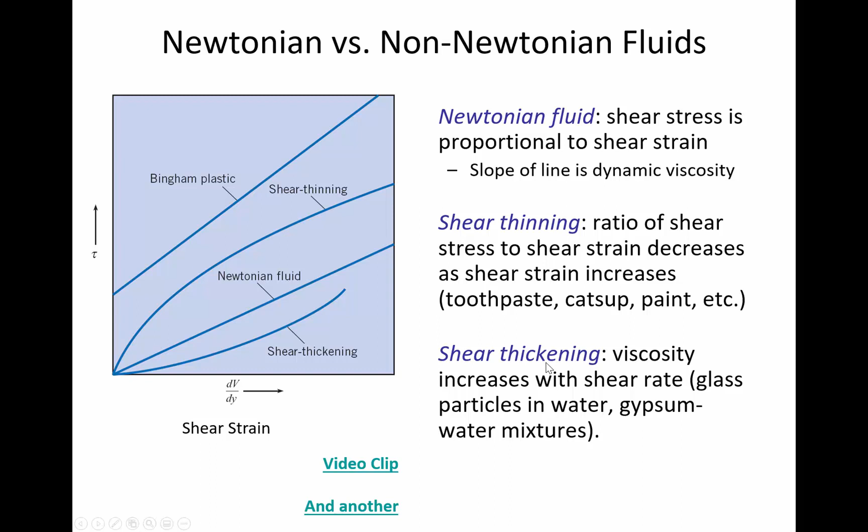I'll give you a cornstarch and water mixture in lab next week, and a spoon. If you stir the spoon slowly, it's easy to stir, but if you try to suddenly move the spoon really quickly through the liquid, it resists the movement. It's kind of an interesting experience that we'll look at in the lab next week.

We are out of time. We're going to have to talk about the gas laws in class on Tuesday.